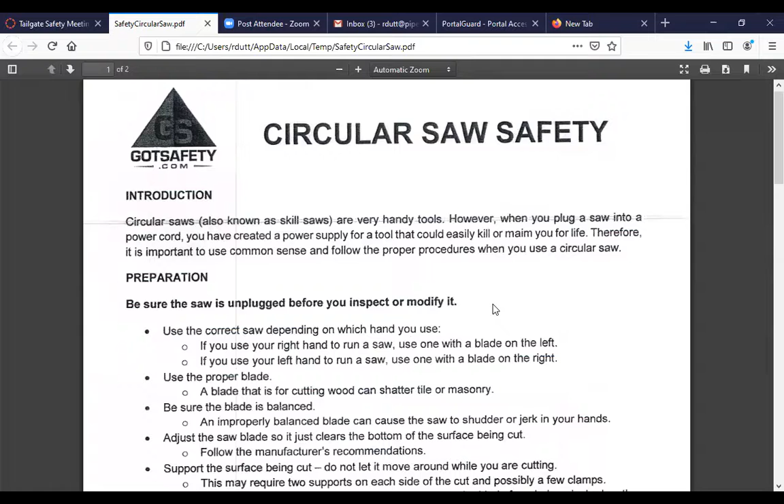All right, I'll read the introduction. Circular saw safety. Circular saws, also known as skill saws, which is amazing actually, I guess it's kind of like tissue being called Kleenex, are very handy tools. However, when you plug a saw into a power cord, you have created a power supply for a tool that could easily kill or maim you for life. Therefore, it's important to use common sense and follow the proper procedures when you use a circular saw.

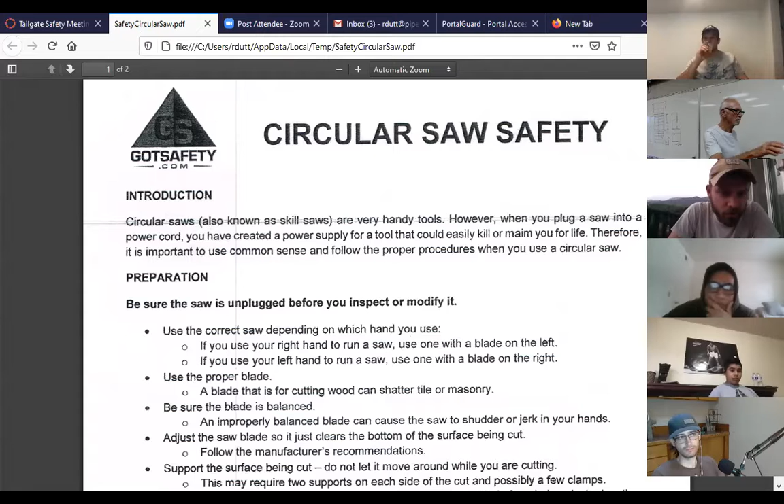Alec, would you continue from there, preparation? Be sure the saw is unplugged before you inspect or modify it. Use the correct saw depending on which hand you use. If you use your right hand to run a saw, use one with a blade on the left. If you use your left hand to run a saw, use one with a blade on the right. Use the proper blade. A blade that is for cutting wood can shatter tile or masonry. Be sure the blade is balanced. An improperly balanced blade can cause the saw to shudder or jerk in your hands.

Adjust the saw blade so it just clears the bottom of the surface being cut. Follow the manufacturer's recommendations. Support the surface being cut. Do not let it move around while you are cutting. This may require 2 supports on each side of the cut and possibly a few clamps. Supports should be sturdy and designed to prevent the blade from being pinched as the surface separates. Keep your work area clean and well lit. Cluttered benches and dark areas invite accidents.

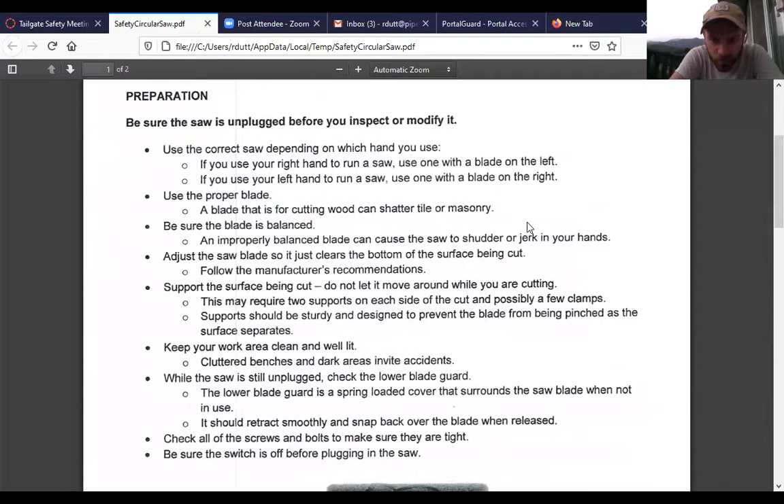While the saw is still unplugged, check the lower blade guard. The lower blade guard is a spring-loaded cover that surrounds the saw blade when not in use. It should retract smoothly and snap back over the blade when released. Check all of the screws and bolts to make sure they are tight, and be sure the switch is off before plugging in the saw.

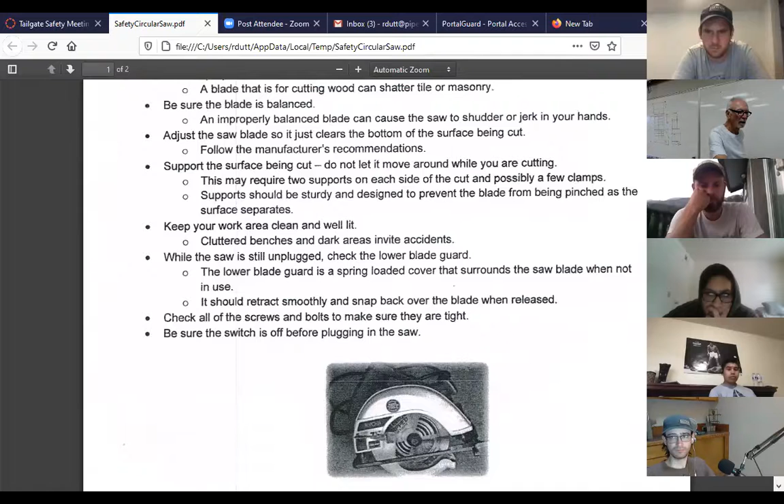Okay, let's have Austin, would you please read using the saw. Using the saw. Wear the proper equipment for the job you are doing. Consider safety goggles, ear protection, and gloves. Make your cuts straight and keep the power cord out of the line of the saw. Keep hands away from the cutting area behind the saw blade. Never remove, strap back, or otherwise modify the guard on the saw.

Okay, let's stop right there for just a second. Everybody here, I'm assuming, knows what a skill saw is? Yes. So chime in if you don't know what a skill saw is. Circular saw, skill type saw. I'm gonna go grab one and just hold it up and show you this guard.

So there are many brands of circular saws. Skil seems to have the one that people like the most. It's a worm drive. This is a 7 1/4 skill saw. It's basically the workhorse. It's the Ford of construction saws, especially rough construction saws. It has a blade guard that they're just talking about, this one right here. See that?

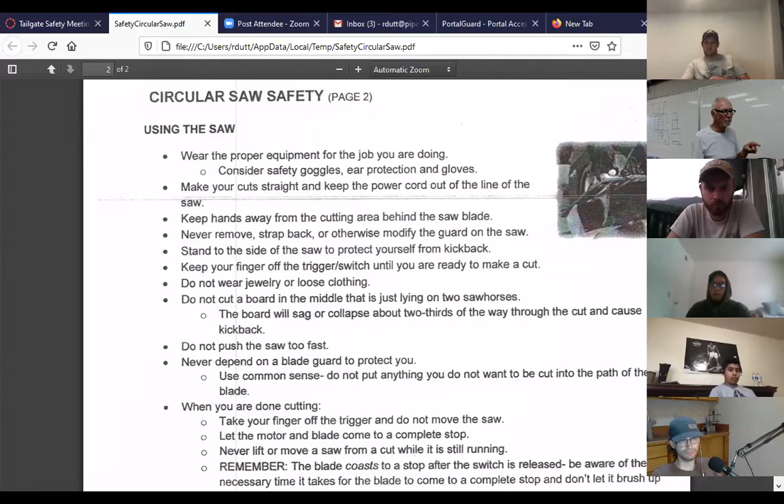And another thing I want to say about skill saws is that I had hoped and planned on doing this next week and then doing a little lab with you guys and a demo on skill saw guides, and how precise you can make a skill saw cut if you know what you're doing, especially with a guide that you'll make yourself for your particular skill saw and favorite really sharp blade. So, but I may do that next week anyway. So who was reading? Austin, keep going please.

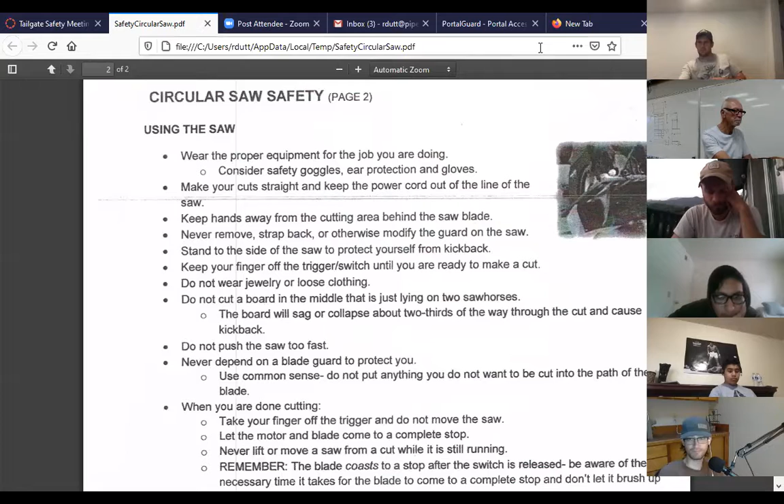Stand to the side of the saw to protect yourself from kickback. Keep your finger off the trigger or switch until you are ready to make a cut. Do not wear jewelry or loose clothing.

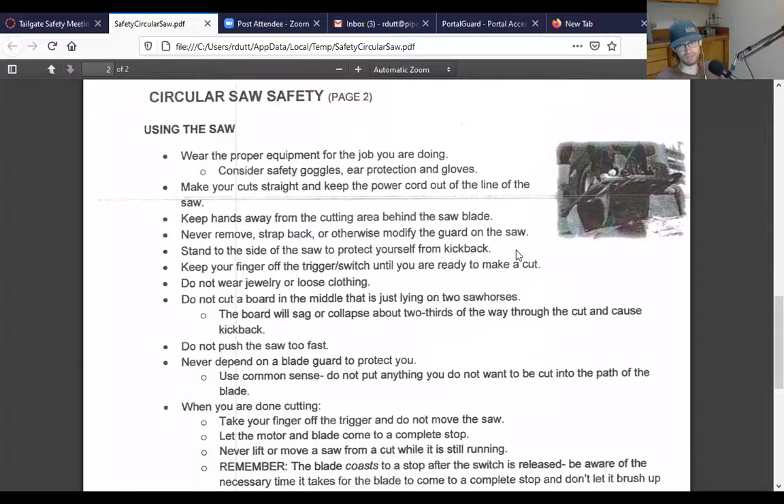Do not cut a board in the middle that is just lying on two sawhorses. The board will sag or collapse about two-thirds of the way through the cut and cause kickback. Do not push the saw too fast. Never depend on a blade guard to protect you. Use common sense; do not put anything you do not want to be cut into the path of the blade.

When you are done cutting, take your finger off the trigger and do not move the saw. Let the motor and blade come to a complete stop. Never lift or move a saw from a cut while it is still running. Remember, the blade coasts to a stop after the switch is released. Be aware of the necessary time it takes for the blade to come to a complete stop, and don't let it brush up against you.

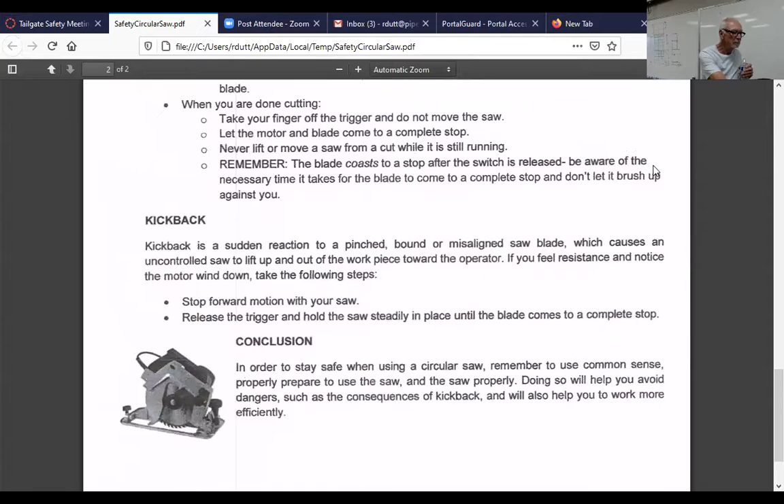All right, somebody else finish. Who wants to? I will.

Okay, John. Kickback is a sudden reaction to a pinch, bound, or misaligned saw blade, which causes an uncontrolled saw to lift up and out of the workpiece towards the operator. If you feel resistance and notice the motor wind down, take the following steps.

Stop forward motion with your saw. Release the trigger and hold the saw steadily in place until the blade comes to a complete stop.

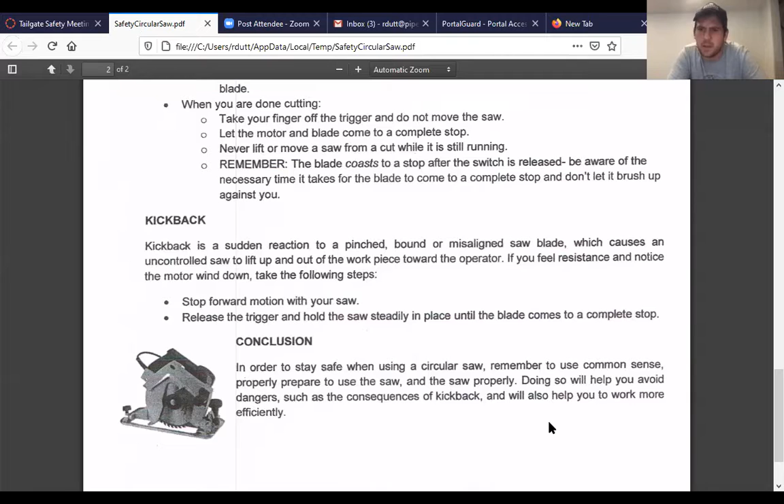In order to stay safe when using a circular saw, remember to use common sense, properly prepare to use the saw, and use the saw properly. Doing so will help you avoid dangers such as the consequences of kickback and will also help you work more efficiently. Circular saws are inherently dangerous.

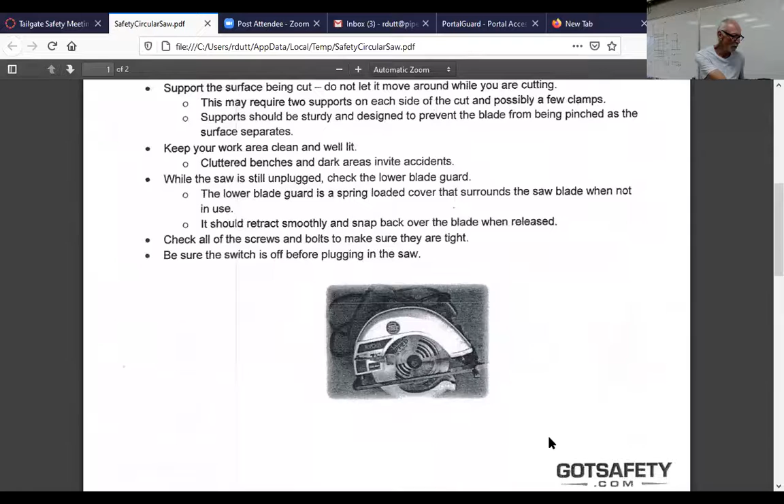Does anybody have any stories about a circular saw? Anybody?

It can really be dangerous because of that blade, unprotected, once the guard's retracted. A lot of people peg that guard open so they have an easier time with their cut, because if you don't, you just let the spring on the guard retract it and you've got to push a little harder. It adds an element to your cutting, and it can sometimes mess you up and mess up exactly where you want the cut. So a lot of guys will pin it back, but I like to use saw protractors and guides.

Go ahead, somebody ask a question? No? Do you have any stories? No, I don't really have any stories. I wish I could say I did. Not really, I don't really wish that.

Probably a good thing I've never been hurt by one, but I've heard about so many guys getting cut. I've heard about guys cutting their thighs because they're supporting a piece of wood with their thigh while cutting down, and they've got their blade pegged. They release the trigger but the saw's still going, and they nick their leg. I've seen it happen a bunch of times. I've seen a lot of accidents with saws.

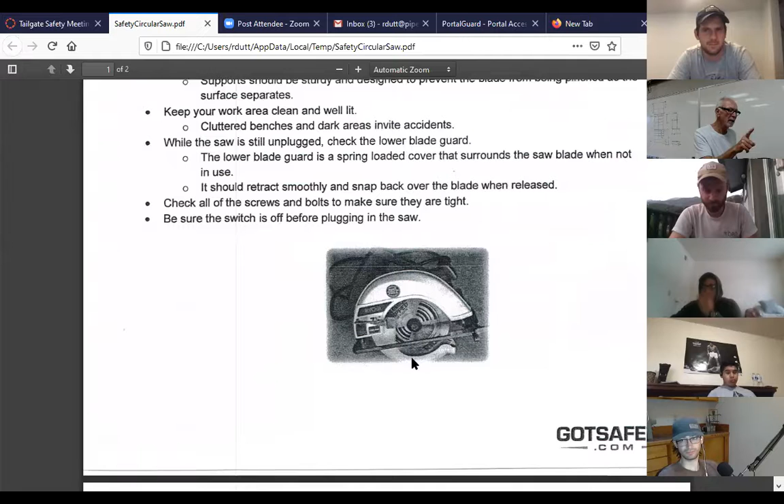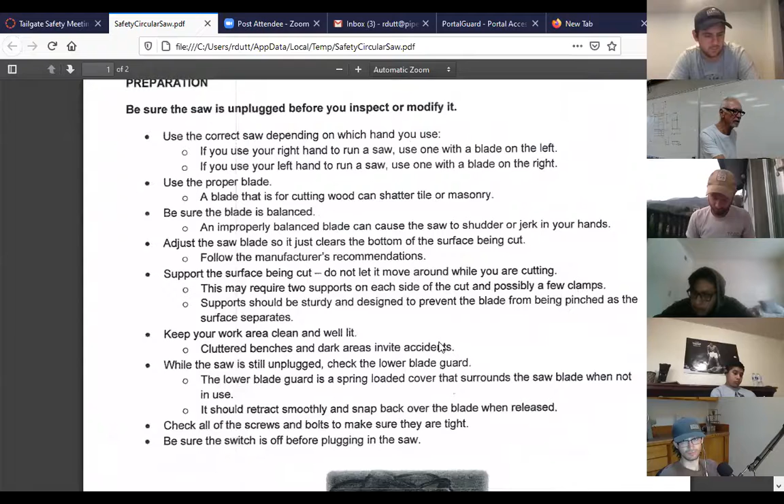And what's my definition of safety? Being aware of where you are and all your body parts in relationship to everything else, right, and everything else being this saw and its spinning blade. So be really careful, please, when you're using a saw, a Skilsaw, any saws for that matter.

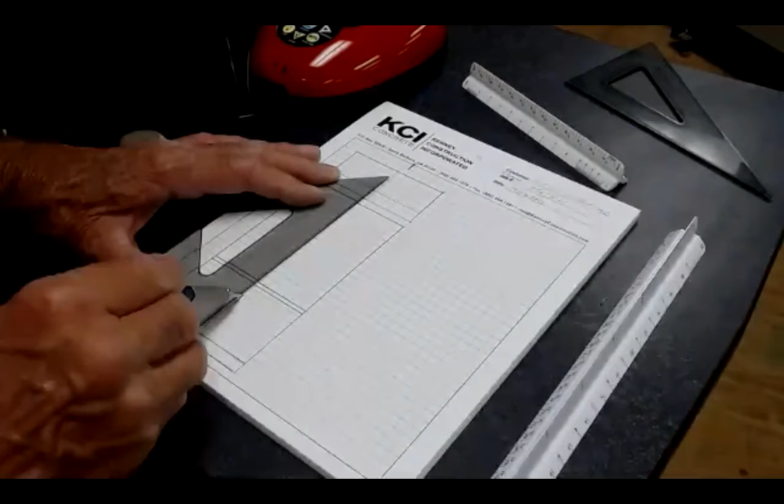So we just take our drafting triangle, put it so it's touching above on that 2-foot line, and bring that 2-foot line right down through there. We don't want to bring it down through our kick because it doesn't go through the kick—it's the 2 boxes set on the kick. So this is a box, that's a box, that's a continuous kick 4 feet all the way across. It's 36 inches tall with a 1.5 inch top. So far, so good, right?

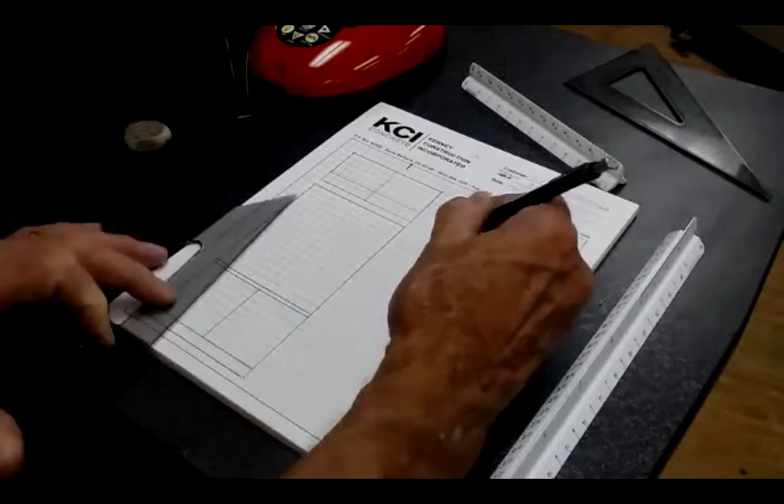Okay, now we'll go ahead and draw in the lines. Well, I take it back—let's get the broad brush strokes for our side view. So we're going to come over, it doesn't really matter. Let's come over 1, 2, 3, 4, 5 quarter-inch squares.

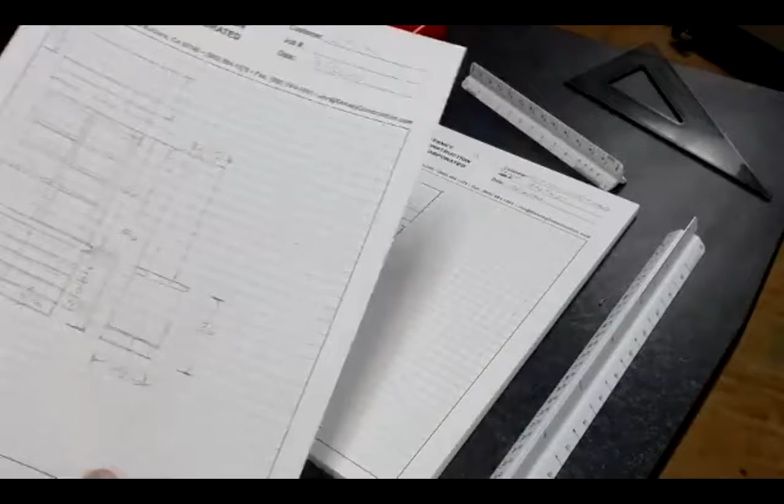Hey Rod, one second—36 to the top of counter? Correct. Okay, yeah, 36 to the top. And again, I should have this up somewhere for you to refer to, even though I've designed and built that cabinet so it's in my brain too. But yes, 36 inches to the top.

Now we're going to draw the side view in broad brush strokes, and we won't have to do much measuring—maybe a little bit. The beauty of this quarter-inch graph pad is, with the kind of numbers we're talking about, you don't even really have to measure. Watch—first I'm going to come over here about 5, and draw exactly the same height as my cabinet, in elevation. That line goes from the very bottom of the toe kick to the very top of the cabinet. That's the back of the cabinet. I don't have to measure anything—I already have.

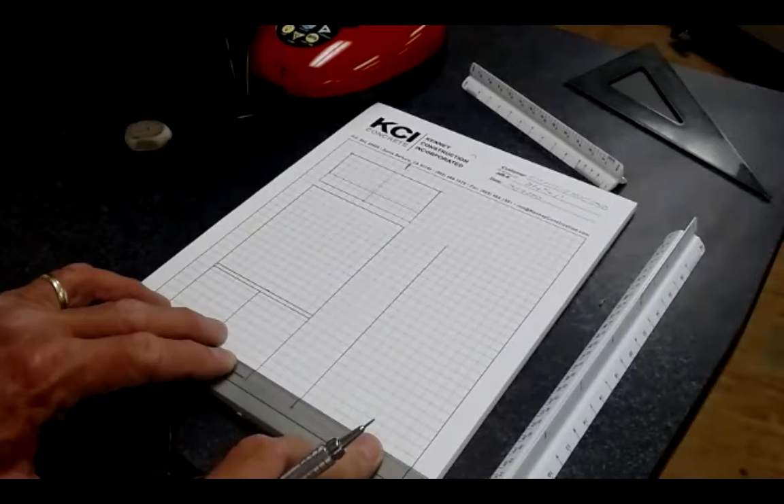Now I want to go over to my base cabinet. Well, first I want to come up 4.5 inches—so I've already got that line. I'm going to put my scale on that line and draw over 2 foot deep, right? 2 foot deep, and 3/4 scale is 6 of these guys—0 at the back to the 2. 2 foot deep, I counted 6 squares.

Will somebody explain to me what I was doing when I counted 6 squares? Somebody, anybody? Okay, how many quarter-inch squares—isn't that 2 feet? That's exactly right, Donna. Because in 3/4 scale, 3 quarter-inch squares is 1 foot, so twice that, 6 quarter-inch squares would be 2 feet. So we got your 2 feet here.

And let's go ahead and go right here, and we'll draw this top. Actually, the top projects out—I'm going to go ahead and project it out a little bit.

And we can finish it off in a minute. Remember, I'm drawing from my kick, so there's my 2 foot box. Now I didn't draw all the way down because the kick is recessed 2 inches.

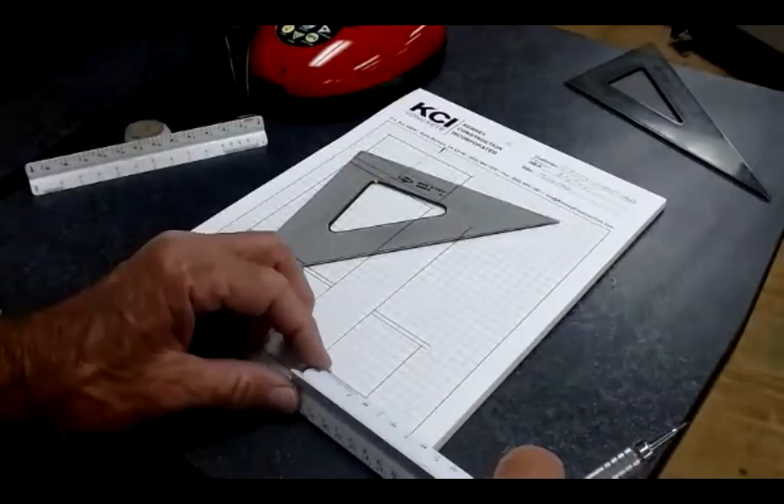So I'm going to take my 3/4 scale, find the 2-inch tick mark, make a little mark, go down, make that vertical, come across the bottom. Okay, so I've just drawn my toe kick and the side view of my box.

These are going to overhang about 1/2 inch past the drawer front, so that's about 1 1/4 overhang. I'm going to make that top right there.

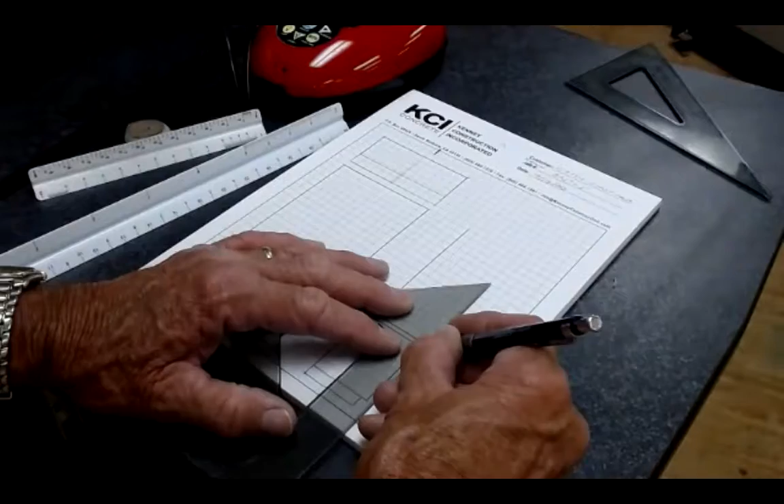And then at 17 inches is the depth of my upper bookcase box. It drops down on it. So I'm going to take my 3/4 scale. 17 inches is 5 plus 1 foot.

You notice I'm just using tick marks. I'm not drawing with my scale rule. Scale rule is meant to measure, drafting triangles measure, put tick marks, connect the tick marks with the drafting triangle.

Okay, so now I've got a side view, and it's a little bit out of parallel. I don't like that. See, these white vinyl erasers erase that 0.7mm pencil really well. So I'm going to draw that line.

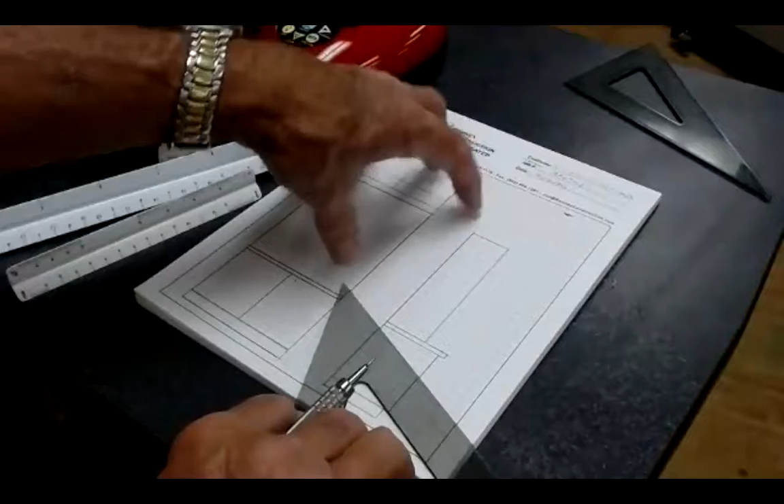Yeah, I'm happy with that, that's parallel. So now I've got my 17-inch deep bookcase cabinet side view, and I've just brought the lines over. I had to take a few measurements, but then I was able to just carry lines over. So I pretty much have drawn the basics of this.

I haven't dimensioned anything yet, haven't put the dimensions on the drawing. But let's go ahead and draw that upper cabinet. Let's draw the face frame.

There are 2 basic kinds of cabinets: frameless and face frame. The frameless cabinets are what we built in the shop—Euro style, 32mm, frameless, no face frame, doors hang off the boxes. Or a face frame cabinet, which has a face frame that hangs on the box, and then the doors or whatever hangs off that.

So typical bookcases, like okay, lower cabinet, drawer bank in this case, edge banded casework, no face frame, frameless, just 2mm reveals. Upper cabinet is more of a bookcase cabinet with a face frame. The doors hang off this face frame.

A face frame is consisted of stiles and rails. Which members are the stiles? The vertical ones, there you go. And how about the rails? Horizontal, exactly. Stiles are vertical, rails are horizontal.

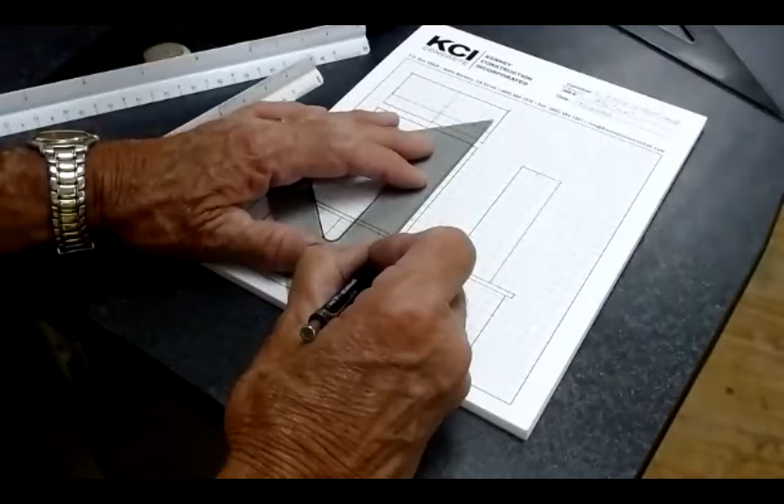Let's draw the stiles of the face frame upper cabinet. There's the right stile, there's the left stile. We're going to make this top rail 2 inches because I want to cover 1/2 inch of it with the crown molding when we finish it with a crown. So in 3/4 scale, I'm going to draw that at 2 inches.

Make a tick mark, come across. That top rail goes all the way across. And then your mid stile, the one going right here, is going right dead in the middle. I'm going to split it 3/4 in the middle and do 1.5 inches mid stile.

And I'll bring that mid stile from the top rail down to the top. Okay, so this is pretty much the basis of the cabinet. Now let's go ahead and flesh this out a little bit.

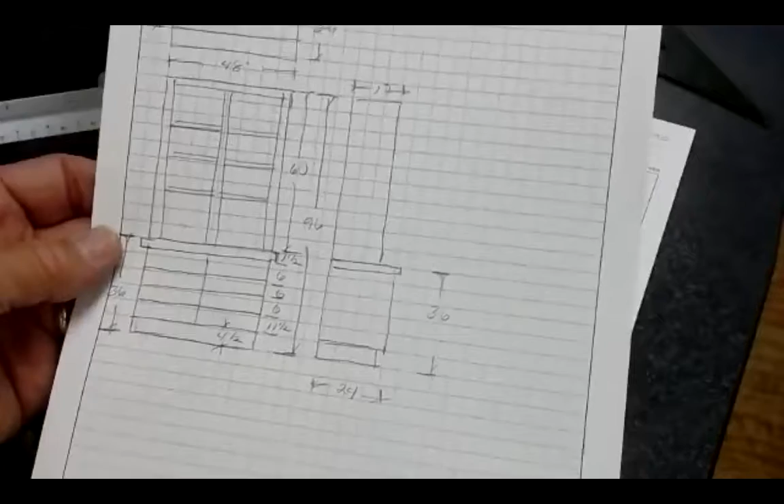We'll put the drawers in the sketch—oh wait, I did that on that too. In the sketch, I sketched the drawers, I dimensioned them, right? Sketch and dimension, sketch and dimension. So the drawers are 6, 6, 6, and 11.5.

And that doesn't take into account the reveals between them, and you won't really need to at this point in this kind of a drawing. So in 3/4 scale, we're going to go 6 inches, 6 inches, 6 inches, and then what's left is basically 11.5. And that's what's left, which means we've drawn our scale drawing, right?

So you see how I just checked myself? If I hadn't done my scale drawing right, that wouldn't have worked out. But because I did do my scale drawing right—so if you think about it, what's 3 times 6? 18.

Okay, so that base cabinet is 36 inches tall, right? And we've got 3 6-inch drawers, so that's 18. We've got one 11.5 inch drawer. We've got a 4.5 inch kick. We have a 1.5 inch top.

So what's that add up to? 6, 24—that adds up to 35.5. And that 1/2 inch that's missing between the 36 and the floor, that's in the reveals. Those 4 1/8 inch reveals—2 millimeters, 3 millimeters, 1/8 inch—those reveals add up to 1/2 inch, and that plus the 35.5 inches makes a 36 inch top. So you just checked yourself, so you know your math is working.

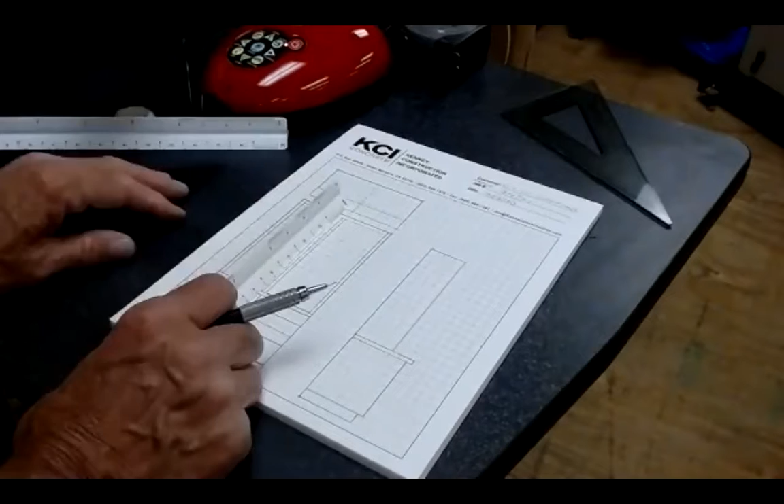So 46.5 is 3 foot 10.5 inches. So I'm going to find 3 foot right there, and I'm going to come up here to the inch part and go 1.5 past the 9.

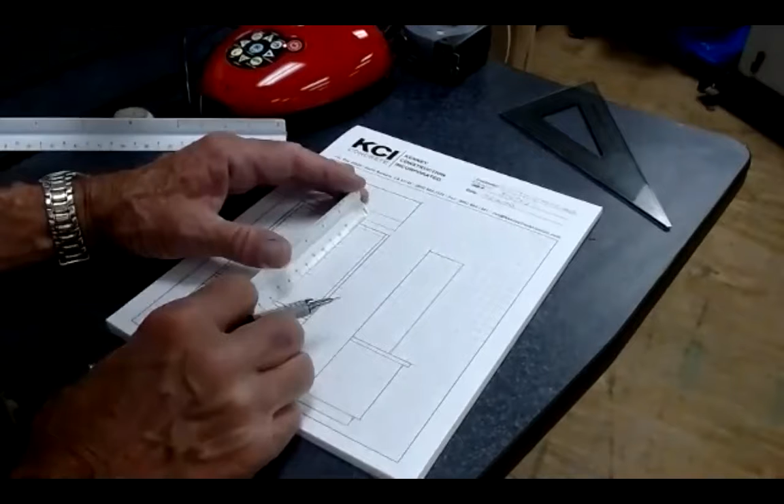Coming down from the top - actually those have a 1/2 inch overlay. So what did I say that was, 46.5? Yeah, we're going to call it 46 because the doors overlay. So at 46, that's 3 foot 10. So I got it on the 10 inches, making a mark at the 3.

I'm going to go like that, and that's going to be the bottom of the shelf edge banding - that bottom shelf that my doors are going to close against. I'm going to do a tick at 1.5 inches, because that's the thickness that the shelf edge banding is.

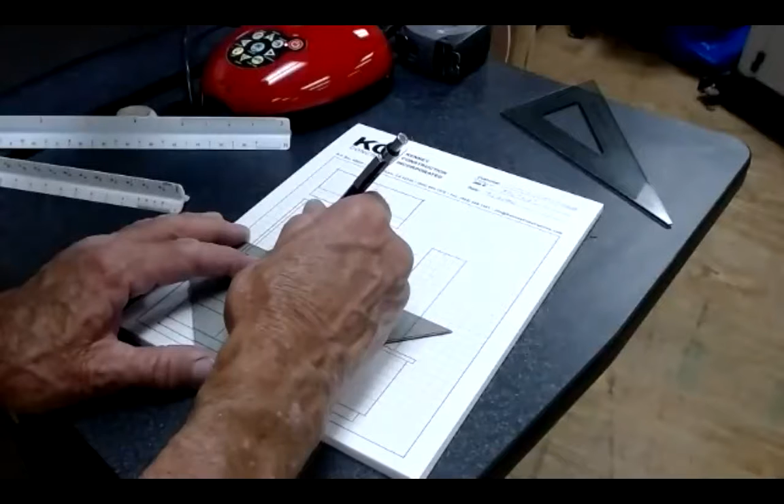All right, so I just drew in the bottom shelf, exactly to scale the way it's showing right there. I'll go ahead and draw in those other shelves just for the heck of it. I'm going to draw them pretty light so they don't get in the way of my door when we draw the doors.

I'm just drawing the shelves that I laid out in 1 foot increments with a 1.5 inch edge band, and it's going to look like this. You guys are also doing a drawing that's going to look exactly like this too. By the way, you're all doing this drawing.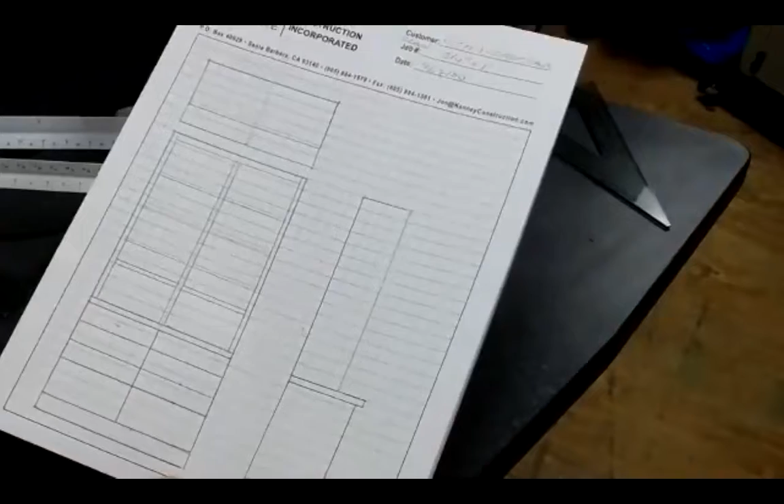And this drawing is going to be handed in. Now, I don't expect you to finish it tonight - I'm not all that concerned, but it would be better if you did. What we'll do, yeah, we'll keep going. We'll dimension it, we'll draw in the crown, we'll dimension it.

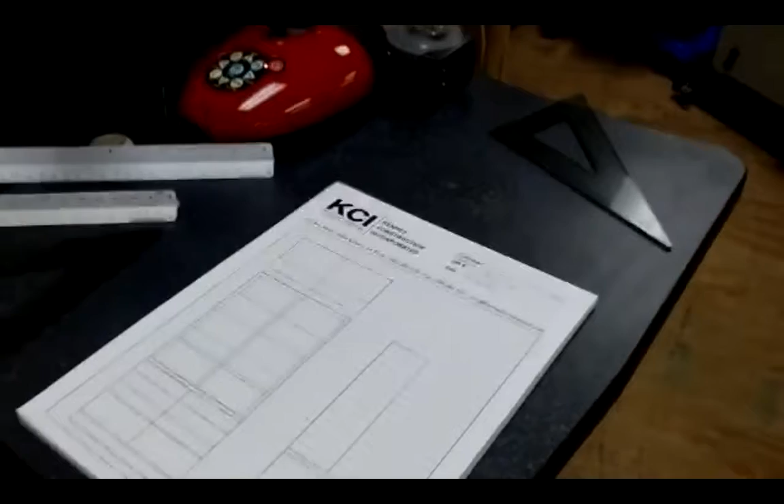And we'll go ahead and draw in the doors too, and then you get a really good look at it. So that crown - the first way I'm going to draw that crown, because I like the look of the crown - try to picture this drawing doing a couple of things.

One is, it's given you all the dimensions that you need to rebuild this cabinet, so you can cut a list off of it, right? You're going to build it in another room. It's also given you something for you to see, but almost more importantly, for your customer to see, so they can see what they're buying in scale.

So it's actually going to look like this. You can draw it so it really looks like this. You can draw in the drawer pulls, the whole cha-cha. So let's go ahead and draw in the crown molding.

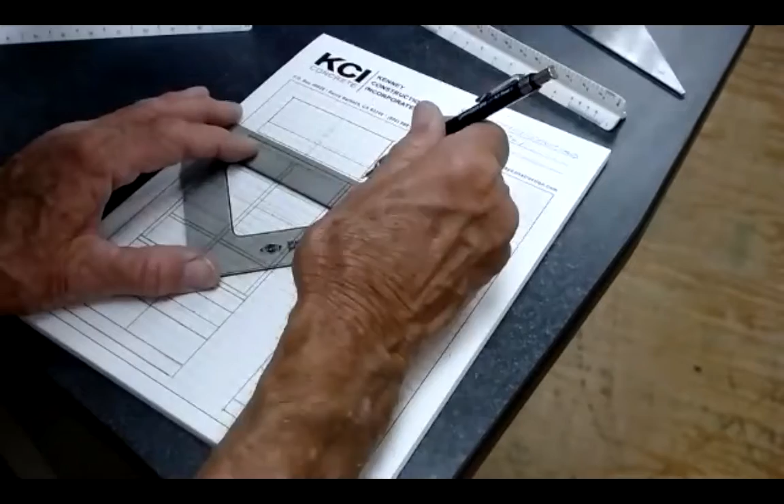That crown molding is a 3.5 inch crown. I think it comes up 2 5/8, but for purposes of this argument, I'm just going to make it in 3/4 scale. I'm going to come down 1/2 inch onto the top of my top rail and put a little tick mark at 3 inches, and I'm going to run it wild, which means I'm going to run it past the sides.

It actually runs by 2 inches because it extends out 2 inches. And then I'm just going to hand draw the crown - just a kind of a classic crown.

How high did you say it was off the top? 3 inches tall and 2 inches out on the sides. And see, once I draw that, I don't have to dimension it - I can come over here and just continue it.

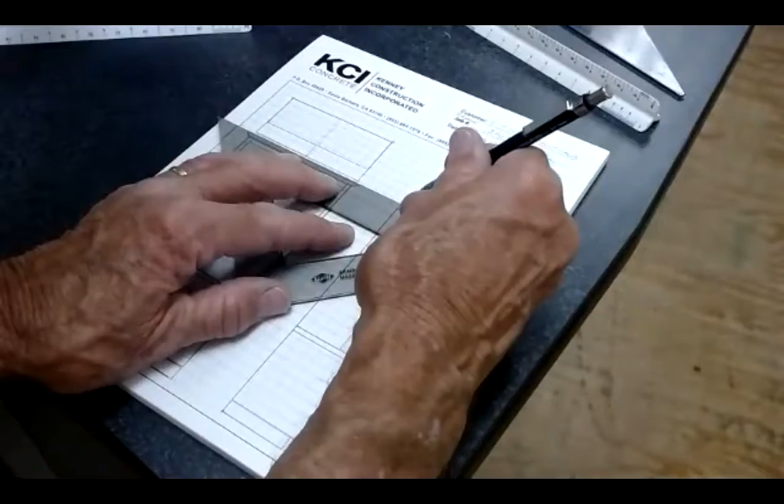And then draw another line there, and another line there. So you see the crown molding on that? You see the crown molding I just drew?

No, hold on, I don't see it. Yeah, you do, you're not looking. No, not right there. Crown molding, see that? See that little molding I drew on top? And the molding I drew on top there?

3 inches high, 2 inches out. It's this crown molding right there. That's a colonial crown, a 3.5 inch colonial crown, I think. Might be 4.5 inch. No, that's a 4.5 inch colonial crown. So it's 4.5 inches this way, but it's 3 inches on the vertical and 2 inches out. That crown is a pretty standard crown.

I like it, I've used it a lot. Matter of fact, I've used it so much I don't like it anymore. I really don't like it as much as I used to anyway.

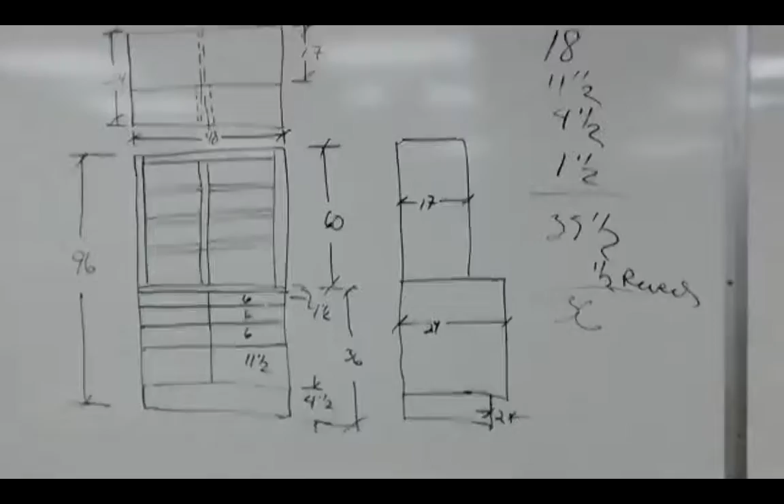Cabinet in the background. Dimensions sketch. Dimensions on the board, right? That cabinet sketched and dimensioned. Now back to our scale drawing, which is in scale, just as though it were real.

Let's go ahead and draw the doors. The doors have stiles and rails, and I'm going to go measure since it's right here. Pretty sure they're 2.5. Yep, 2.5 stiles and rails, and that is right dead in the middle, that mid rail. So I'm going to make some tick marks on my 3/4 inches at.

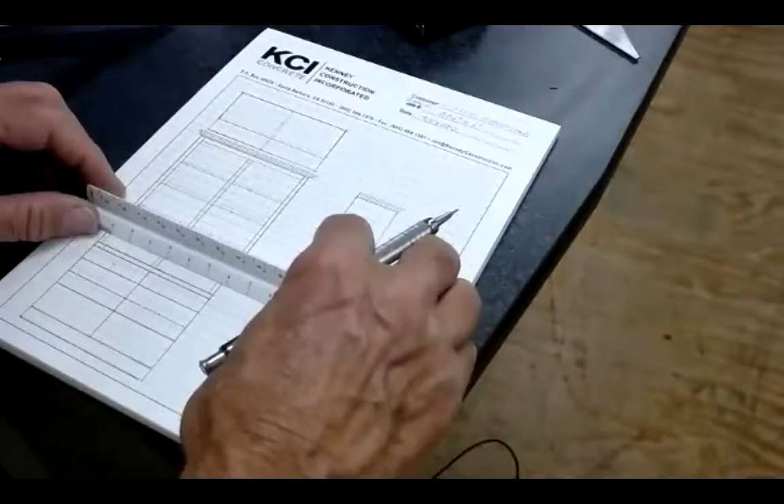Well, here's the funny thing though - this isn't all that accurate. And the reason I'm saying that is because those doors overlay the face frame 1/2 inch. So just for purposes of this drawing, I'm going to draw that as though they were inset or hanging inside the face frame, when really they overlay the face frame. If I was drawing this really being specific, I would have drawn that face frame inside edge as dotted, because it would be hidden by the doors. But it's a solid line now, and this is how I had envisioned this cabinet being made anyway. It's just like this, and then at some point I decided to make doors.

I decided to do a door clinic, and let's make cabinet doors. So let's just show the doors on it, because I think it looks really cool. And we'll forget for a minute that they're overlay, and we'll say that they're full inset, because I'm going to stop for just a second and show you

the 3 ways doors are hung on a face frame. So if this is a cutaway of that stile, it's a 1.5 inch stile. We're going to draw it with the doors full inset flush. Full inset door style, panel on the door, right? That's full inset flush. That's how we're going to draw it.

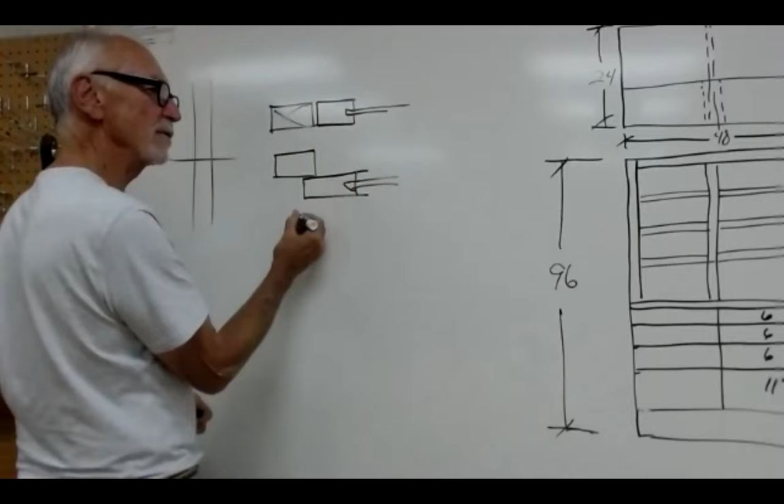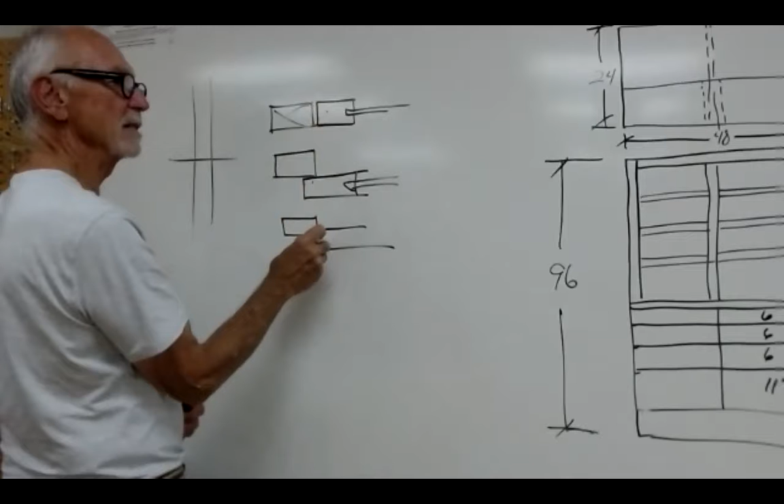They're actually hung full overlay. The 3/4 inch door sits outside the face frame with a 1/2 inch overlay - it overlays the face frame 1/2 inch and sits outside the face frame. And then the third way cabinet doors are hung on face frames is they're hung as a lipped door, with a 3/8 offset lip. So half the door hangs inside the face frame and half hangs outside the face frame. So full inset flush, full overlay, lip, or 3/8 inset - those are the 3 ways to hang a door in a face frame.

Now let's draw those doors, because it'll really make the cabinet look good. And then we're going to take a break, and then we're going to do a simple floor plan. Time flies when you're having fun.

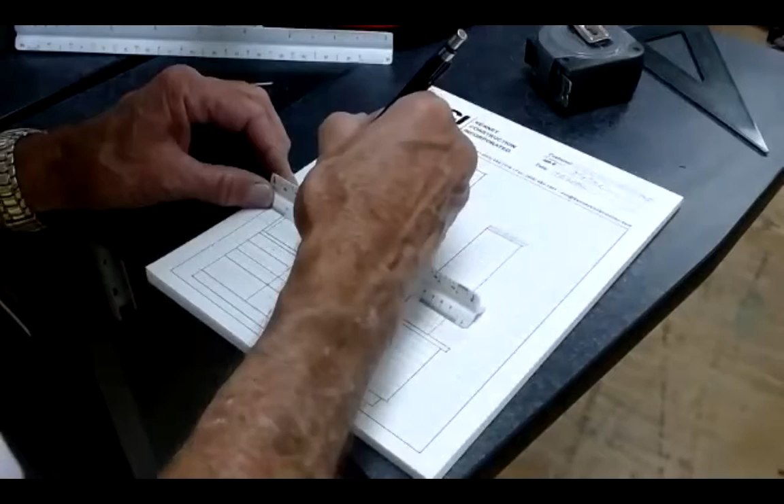Okay, so in drawing those doors, I'm going to make tick marks at 2.5, 2.5, 2.5, and 2.5. So I'll draw the stiles first, because the stiles always run long, they always run through. Stiles run long. Oops, shit.

So this is where an erasing template comes in. I didn't mean to draw that up past my face frame, so I'm going to put this erasing template, or erasing shield, on it. I'm going to erase it. I'm going to draw this stile.

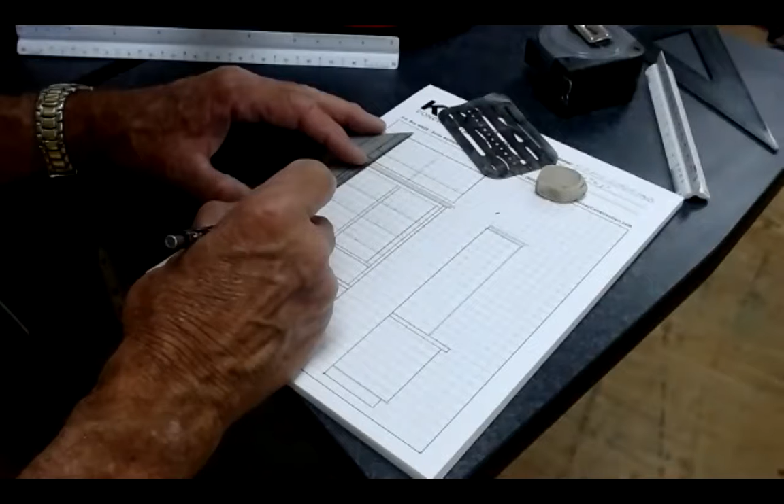It's 2 doors, I forgot. So I've got to come over here and do my 2.5.

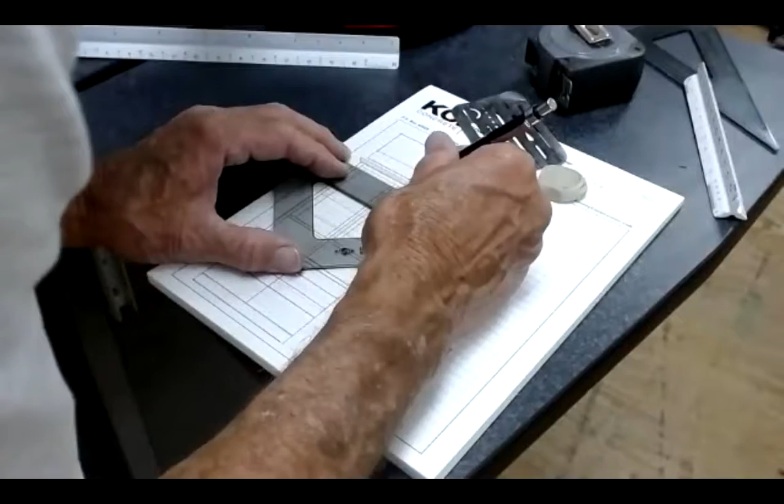That face frame should be shown as a dotted line, but it's not, so we're going to go ahead and draw these doors. Top rail, bottom rail, and then mid rail. The shelves should be shown as dotted lines too. I want a mid rail right in the middle of those doors, the height of the doors.

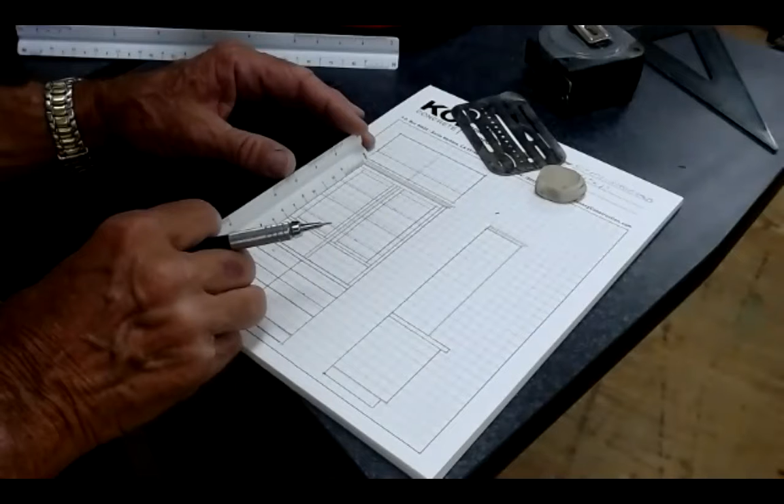If I measure them to scale on my drawing, those doors measure 3'9", which is 45 inches, so half of that is 22.5. So I'll come down 1 foot, 10.5 inches, that's center. I'm going to put the center of a 2.5 inch rail on there and go ahead and draw the rail.

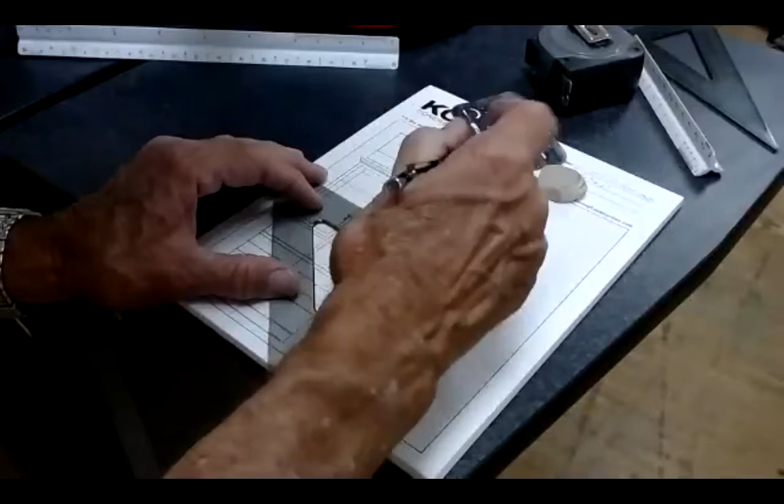There's a few confusing lines here, just because the face frame is behind and isn't drawn. The face frame is not drawn as a dotted line, but there's that cabinet right there in the scale drawing.

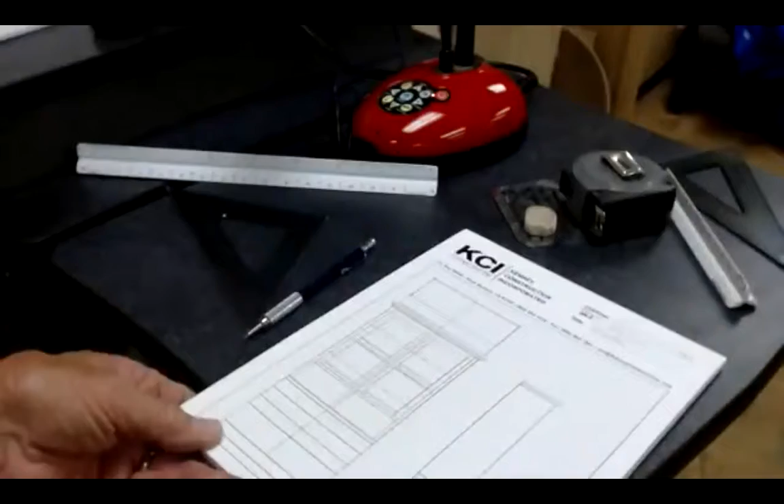Now the last thing you're going to want to do is dimension it. I won't dimension the whole thing, but just to show you the way I dimensioned it, we could come up here and do a hash mark and a hash mark, and then draw a line like that. There's a space in the middle, tick, tick, 48 inches. That's dimension now.

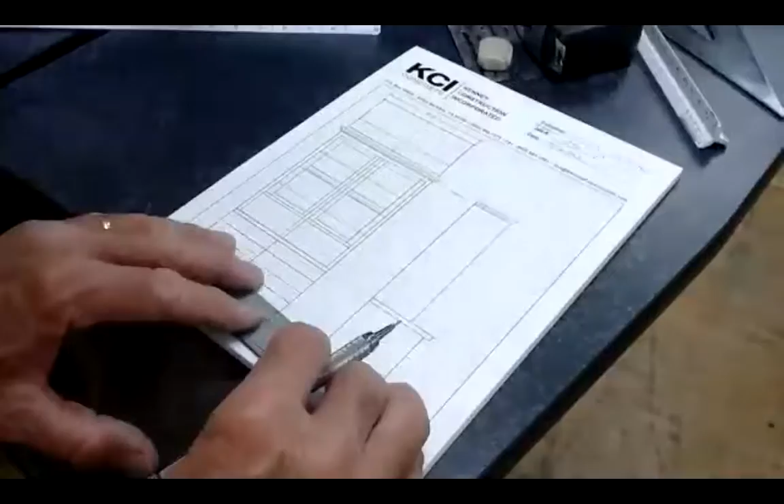The height of this, without the crown molding, let's go like this, and we'll leave a space, hash mark, 96 inches.

Those are the basics, right? And then we can go ahead and do this inside. Let's just draw 24 inches, and we'll go from there to there. We'll do this one 17 inches, from there to there.

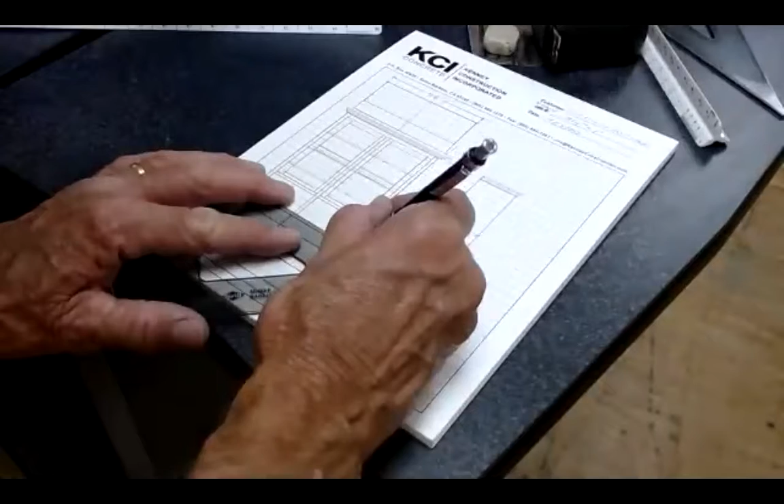We'll do this one at 36. Let's do that, 36. Let's do this 4.5 right here for the toe kick, 4.5. And then what's left of the top, 60 inches.

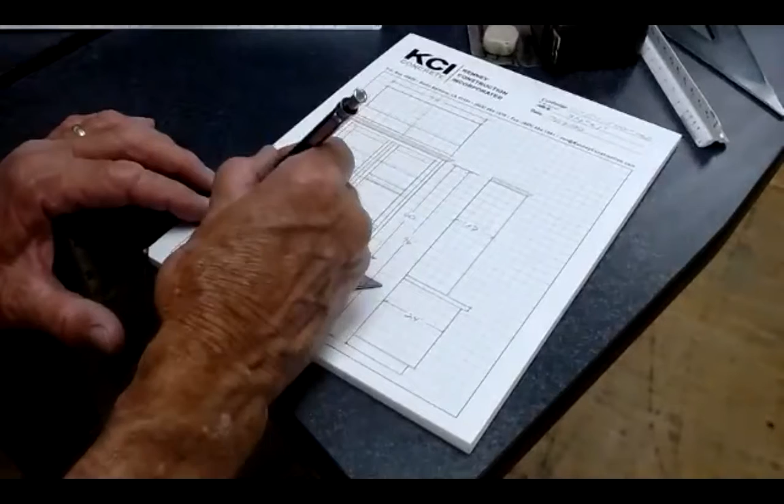We'll continue that line up to our 60 and then all the way to the top line with another tick mark. Now we've pretty much got a lot of the good stuff, we haven't done the drawer dimensions. A good way to do those would be like this, you can see that.

We could go 6, 6, 6, 11.5, and then put in our marks showing what it is we're measuring, and then the little hash marks that stop where we're measuring. Everybody seeing that?

I'll do something with this, I'll get this up somehow. I think you're about 20 steps ahead of me at this point. Yeah, I'm sure I am, I'm sure I am.

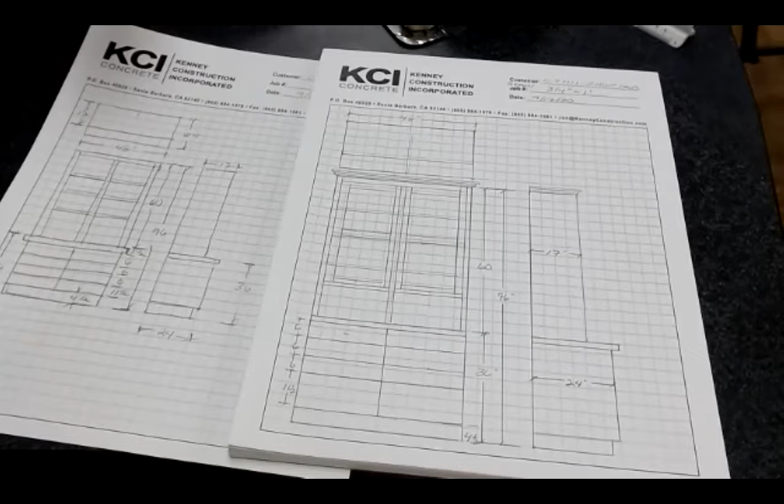Why is John Sesser on speaker view? What the hell, John Sesser, how is that possible? Are you talking about me? Yeah, I'm going to mute you and see if I can get myself on speaker view. No, you come up on speaker view. What the hell, that's so weird. I should see myself on speaker view, but I don't. Sometimes whoever logged in first is permanently stuck, I've had this issue too. Let me leave and rejoin real quick, see if that fixes it.

Okay, come back people. So has everybody been drawing, I hope? Everybody's been drawing? Okay, Noel, Jose, Brandon, James, Victor. No, I James, haven't, I don't have the graph paper. Oh well, who said that? Noel? Yeah. Dude, what happened?

You had a week to get this stuff, what happened? Did you go on vacation or did you forget? What happened? No, yeah, I just forgot. You need to borrow $10? No.

Okay, so you got to get it. Who else doesn't have graph paper and all the stuff I asked you to get? Everybody but you? No. So you're gonna have it by next week? Yeah. Good, it's like you won't spend $20 on it. So actually 10 wouldn't do it, you're gonna need to spend 20, but get it okay, and that way you can draw something to scale.

I want to see you guys draw something to scale. So has anybody drawn anything? And if you have, could you show me what you got? Okay, looks like John's got a box with doors, and look at a nice side view. Donna, you got anything?

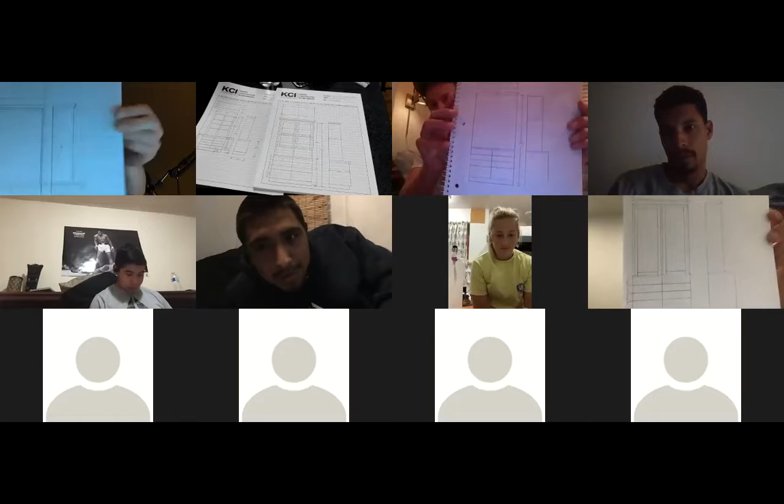I had a really hard time keeping up with you and trying to read the ruler accurately. I have a box, I said, but I was taking notes as you were talking. Okay, good, well you've got that.

Does anybody have trouble with the concept of finding the inches and all that stuff on the scale rule? I know sometimes guys and gals get hung up on just being able to use the scale rule. So does everybody know how to use it? In other words, when I say draw a line 17 inches, do you know how to do that? Do you know how to find 17 inches in 3/4 scale?

Yeah, everybody knows how to do that? Jose, do you know how to do that? Could you draw a 17-inch line in 3/4 scale? Yes? Okay good. Austin, could you do it? Yes, I think I get it. Donna, could you do it? Yeah, because of that trick that you showed, since there's 12 inches in a foot.

Every scale is going to have that. Every scale, like where it says 3/4, all the little tick marks in front of it, that's how they divvy up inches. You see 3/4 is able to divvy up in half inches because it's a pretty good scale. But if you come down to a quarter scale, it's barely inches, pretty small. It's pretty hard to see anything but like 4 inches in quarter scale, maybe 6 inches or 3 inches. And in an eighth scale, inches are even smaller, barely visible.

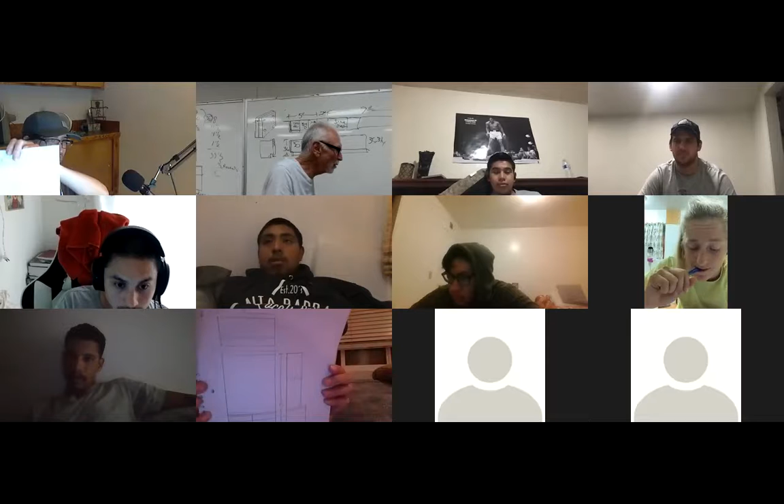Okay, hey, you've made tremendous strides. Who else? Let's see your stuff.

Noel, you can stop showing me your stupid ruler. Jose, dude, what the heck, man? That looks good, it's a little off. Oh wow, nice, yeah, looking good, man. Austin, did you do anything brilliant? T-square.

I kind of lost you around the drawers and whatnot, but you got paper and everything, right? I got rectangles, I got stuff. Good, you got rectangles, yeah.

So is anybody confused or need some explanation on the concept of the scale rule and scale drawing? No? And you all understand where the inches are, right? You're using 3/4 scale, those are the inches, and the rest are feet.

And then if you notice on this, besides the inches and the feet, 1, 2, 3, 4, every one of these tick marks in the middle, like 28, 26, well that's reading from 3/8. So in the 3/8 scale, from 0, that's 28 feet in 3/8 scale. But going this way, we know those tick marks in 3/8 are 6-inch marks. So if you want 30 inches to scale, you can go from 0 to 2 and the next tick. That's 30 inches, right there.

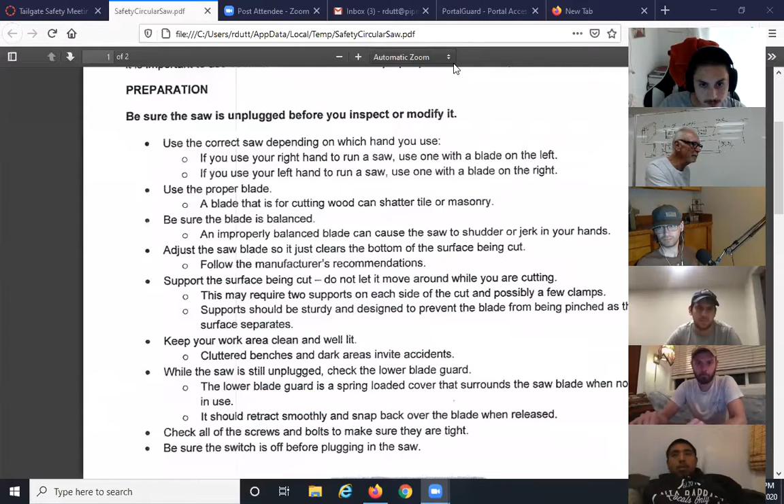No? Check this out, I'll show you this house. Ready? I'll share the screen with you. The website? Yeah, I've been there. I haven't. Let me see if I can hide these floating meeting windows. Okay, go to...

It's the same guy who owns Hermitage, right? Yeah, that's right, do you know Ted? Ted Gardner? No, but I think you showed us a few pictures in the first class. Yeah, yes, I mean, I may have.

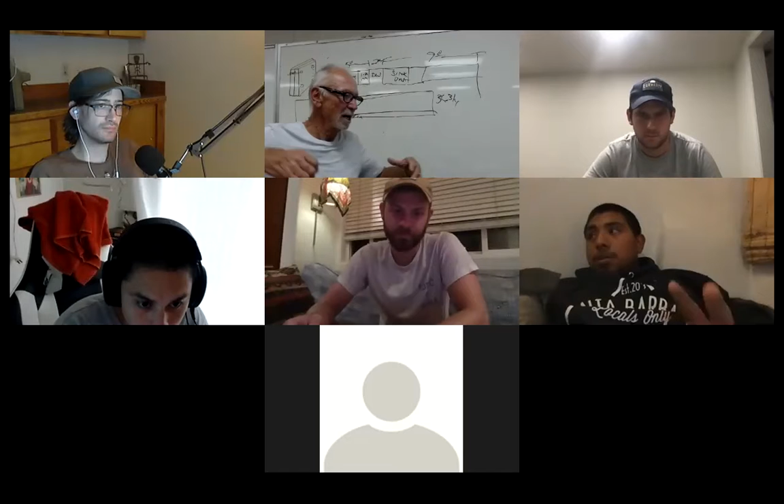Then this company will take them to Simi Valley and fabricate 16-gauge stainless and wrap it around the edges. So it'll all be mirrored stainless, and then we'll get it back and glue it onto the wall with the templates that we made. We'll put it on with a high heat adhesive and kick it off. It's going to be a tricky project, but that's the kind of stuff that's the most challenging. The hardest stuff is the most fun. It's all doable.

There's almost nothing I've seen yet that I couldn't do, including the book house and the piano house. Imagine laying out that house - I laid it out on a bare lot. Some of those radiuses were 54-foot radiuses. I had to strike 54-foot radiuses to lay out the walls and the foundations.

So it's all just a big challenge, right? Bigger the challenge, the more fun, the better the opportunity. And it's kind of like in life, right? Same thing - bigger challenges, bigger opportunities. So, which means to me that the bigger the bummer, the bigger the opportunity for growth.